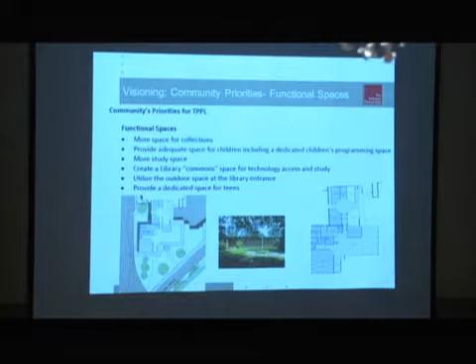From the visioning report in late or early 2014, people wanted more space for the collections, and that's been reiterated more than once as we've met with both staff and the public, that this is a materials-intensive library, and that's quite important.

Everybody wanted to see a separate children's area, to provide more study space, to really have a place for more technology, which everybody seems to ask for these days, and a place for teens. Years ago, people tried to figure out how to keep the kids out of the library, and now everybody wants to make sure young children and teens are really readers and that the library is part of their everyday life.

We developed a program—this is a summary. Basically, it tells us the library needed a little over 14,000 square feet. There is currently about 9,400 square feet. So part of the goal was to determine how we might be able to expand the library, with a goal of a little over 14,000 square feet.

But I think, as you might realize, anything is going to help—not only in terms of space, but in terms of the way it's organized and laid out. When you look at the library, there are some pretty important elements that are very strong parameters to decision making.

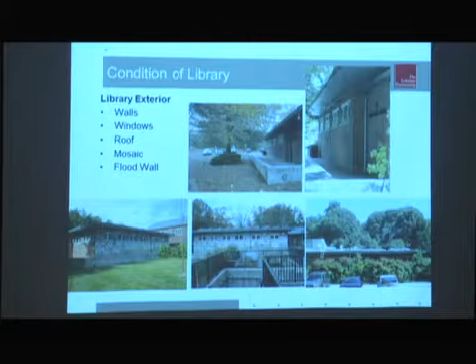There's also the mural on the wall, which is a very important element, we all think. But basically, the exterior of the library is in pretty good shape. The roof is in pretty good shape—it's got photovoltaics. Windows are pretty good, the walls are pretty good. So that's never been a real issue.

However, the inside is a different story. There are some pretty archaic mechanical and electrical systems. The furnishings are kind of old and tired, but you all know that—I'm not telling you anything you don't really know.

There are some code issues in terms of bathrooms—they're both inaccessible, and the number of fixtures doesn't meet current codes. The space between stacks doesn't really meet current ADA requirements, and when you begin to widen or lower stacks, it just takes more room to house the same collection. So there are some issues that need to be addressed from a code standpoint.

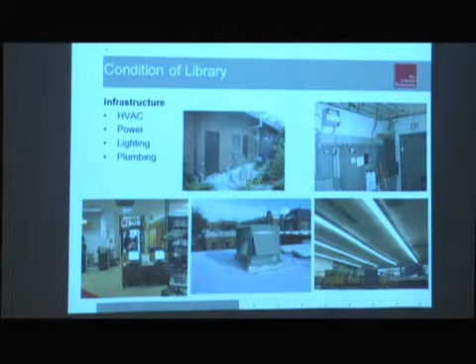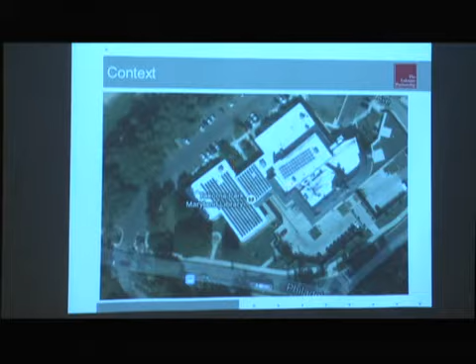But the building is basically in pretty good shape. So let's talk about the library, which is an aerial view here with the community center over here. We've talked a little bit about how important the mosaic is, and the fact that this is an interesting building. This is a black and white photograph of the existing building from the 60s.

Very simple, very clean, kind of an example of international style. To this was added the reference area, which is right in this area today. And the rear of the library has a whole other bay of space. But this is kind of what's there. A very simple L-shaped library with the staff at the apex of the two wings, adults at one end, children at the other end.

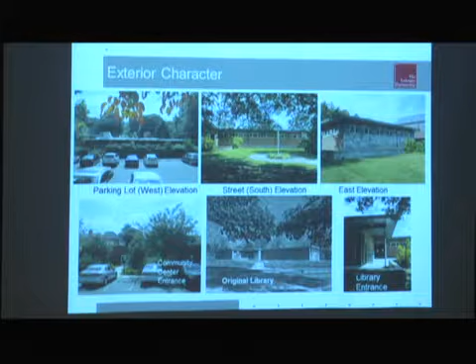Very logical and common way of designing libraries. Windows are typically fairly high, starting about 6 or 8 feet high, which enabled them to line all the walls with books and materials and bring high light in. What it didn't do is enable anybody to look outside, or anybody outside to look inside to see what's going on, to bring more natural light in, and to try to connect the inside with the outside. That's something we've talked about as part of the goals.

So here's a site plan of the existing library and site. The library is basically L-shaped, although it does operate several rooms around what I'll call the atrium - not a real atrium - with a second means of access. You can get there from the front door, or from the back door and come into the library. But it's a little bit disjointed, as you know.

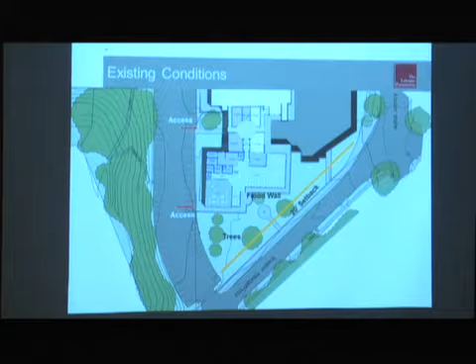The flood wall is an important element, and if we don't have to touch it, that's great. But if we do, we've got to somehow replace it. And we've talked about the mosaic as well. There's also a 20-foot setback from Philadelphia Avenue.

So when we look at the site and think, where are we going to expand this library? We really can't expand in this direction very easily because of all the parking. You can expand this way, but we've heard time and time again, try not to touch any trees - leave the image of this library in a park and expand it without hurting trees. You could expand this way, but that means addressing the mosaic wall, taking it down and either relocating it or putting it back up, and that's not an insignificant task.

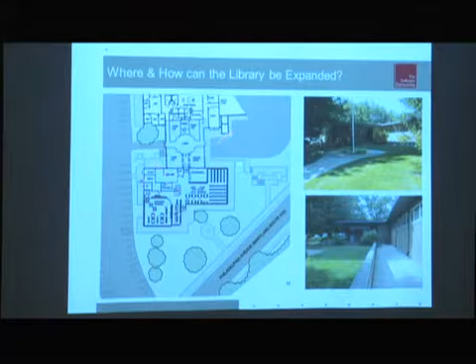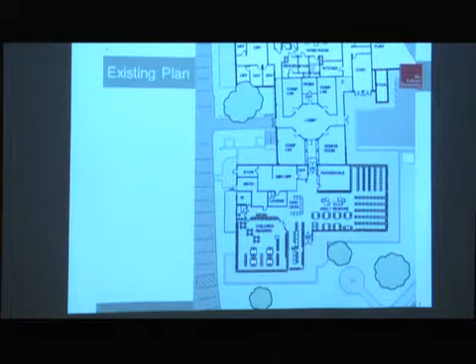People have talked about - this is actually one story down, where the police park - could you bridge over that? That's a fairly expensive way of doing it, and it's really kind of remote from the center part of the library. So we've struggled a little bit. You all know the layout: the children's area, a periodical and storage area, the adult area, and the staff area, which is quite small.

As we look at it, we think about how patrons are going to flow through the library. We want to make sure the staff can monitor what's going on in the library - it's important for them to be able to do that. We also want the staff to be able to interact with patrons and solve problems.

There's been an issue we've talked about over the last months of where is the front door to this library, because a lot of people come in this way, but a lot of people actually come in from the community center. We've talked at length about the connection between the community center and the library, that ought to flow somehow, especially since the library really operates several rooms that are part of it but are almost physically not in the library. So how can we make the library operate as one unit and flow fairly well?

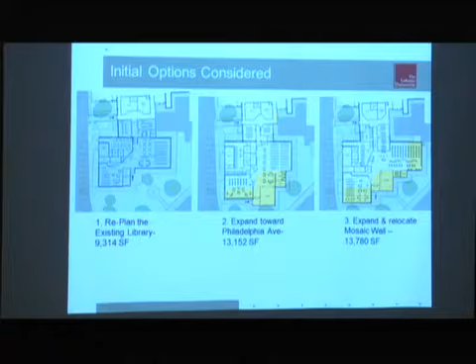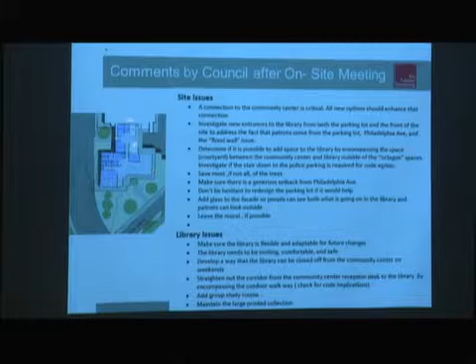So we thought the best place to really begin thinking about expanding is out in this direction, but keeping the trees, not really touching the mosaic because that's just opening a can of worms, but potentially beginning to think about filling in this area, which is kind of a landscaped area. But frankly, if you think of all of this as potential library space, it contains all the library functions in one area. So the proposal, and this is illustrating a piece of the community center as well, so you can understand how these all tie together.

What you see in yellow is new construction. What you see in tan is renovation.

Oh, thank you very much. Sorry about that, I just, excuse me.

And what we're proposing is, frankly, taking the entrance from over here and moving it over to where people park. So you can go directly from the parking lot into the library from this direction. There's also a major entrance that goes into the community center. We begin to tie together architecturally these two entrances to let people know, as you drive in or if you're walking and coming up this way—because you've never been able to walk up next to the flagpole and climb over the wall—so you might as well bring a sidewalk up and recognize the fact that there are two entrances to two civic public facilities right here off the parking lot.

It's where people expect to find front doors. So in this case, we're suggesting coming in this direction.

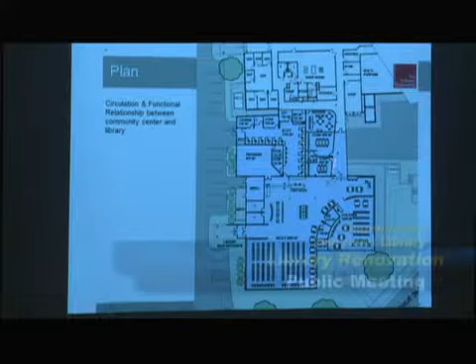These would be all glass walls so that you could see in, so that as you're walking down this area and looking outside, because this is all glass, you could also look into the computer room. So it's not like you're walking down a corridor, you're really walking through a space.

And this is a fairly wide corridor that gets wider as we get to a place where you go down a couple of steps, because the floor level of the community center is about 10 inches higher than the floor level of the library.

And for those of you who've come in down the ramp, that's exactly why there is that little ramp there from the atrium area. So we have to make that up with another little ramp and probably two steps.

So this is the proposed layout. It's about 15,000 square feet, so it meets the size requirement that we thought was required.

And so then we decided to investigate from a 3-dimensional standpoint what this might look like. And for those of you who can remember what the outside of this building used to look like, this is kind of a little aerial.

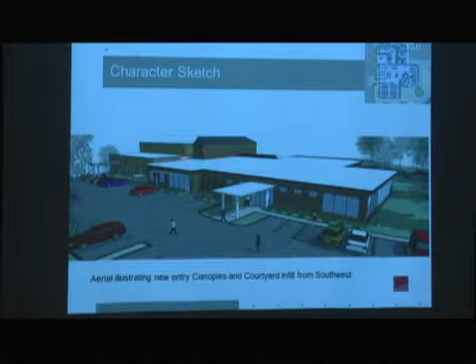Got three things going on here. I'm looking in this direction. This is the existing library, and this is the existing community center.

And you can see basically the canopies. This is a little elevated aerial. This is your flagpole. These are the actual locations of the trees from the survey that we have.

You can see that we've kept the mosaic, and that stops here, but we've expanded the building a little bit more, and we've simply wrapped more glass around it.

Now, this is pretty conceptual at this point, so don't think of this as a final design, but it's a conceptual thought that enables people, as you're driving by or walking, to be drawn into the library, to hopefully discover what's in the library. It's both from a marketing standpoint as well as from a standpoint that it's good for healthy buildings to have natural light.

Frankly, the first couple of times I came to the library, I actually drove by it because it was dark and at night you couldn't find it. So having somewhat of a subtle lantern will enable people to find it. It becomes, I think, an important civic building.

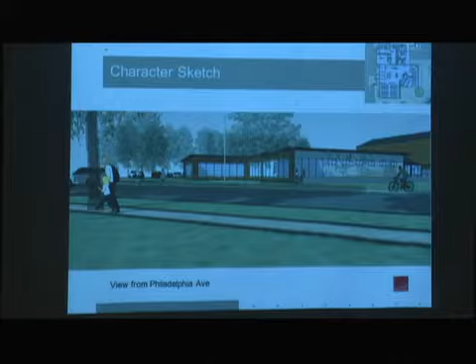From a floor level, if you're across the street, this is the exact location of the mosaic, so you can see we're trying to expand this building so it looks like a natural expansion. We're not trying to impose some new architectural expression on a very simple, straightforward, residentially scaled building. The way we think it ought to be enhanced is through some more glass, with some stepping in it so it doesn't seem overwhelming.

Just a little closer up - an idea of coming into the entrance. These are existing windows, I should tell you. But if we come in to the side, we're showing a little stone wall, a little canopy to lead you into the new entrance.

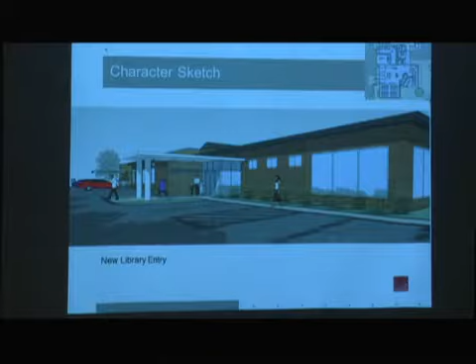We're suggesting that perhaps whatever happens here happens at the community center too, so there's an indication at both locations that here's a front door, you're welcome, it's lit, it's welcoming, hopefully. Just a closer view.

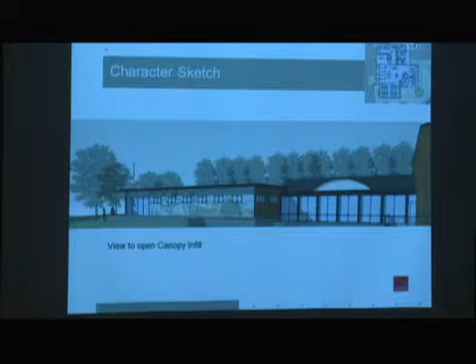Then looking the other way from the community center, we're illustrating the mechanical equipment that's still there, so you can get a sense of what you have. But as I said before, people expect when they drive into a parking lot to find a front door and not have to search for it. So we thought it would be helpful to illuminate and have some sort of sheltered enclosure for both. This is a weird shot because this is a depressed area down here where the cars are parked.

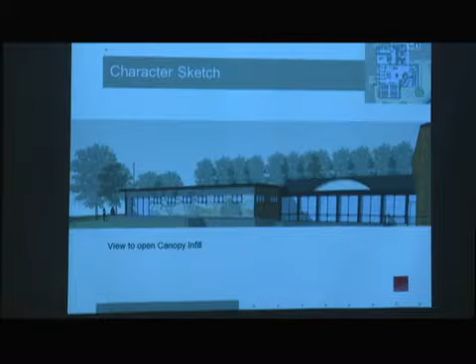But just to give a sense, this is that corridor, and we haven't changed anything here. These are existing columns, and we're simply putting glass between them so you can walk down that corridor directly into the library. Of course, this is all existing, as are these walls. So the garden is still here. We haven't touched some of the landscaping that we've heard is so important.

So that's kind of a big picture of where we are at this point, both from a standpoint of planning how the library might be expanded, and an idea of what it might look like. We haven't spent a great deal of time doing anything other than massing it, to test the plan and see whether it could turn into a nice building that reflects the existing character and continues the theme that's already here.

So, yes sir, if you can go back to one of the floor plan views. Something people may wonder is, is that really all the stacks that there are now, or how does it relate? And can you point out the edge treatment that may not be clear to people. Yes, that's where a lot of that is. Thank you.

We've counted all the stacks in the library today, and all of our options are either right on or very close to the existing number of stacks. That's been one of the goals. We've talked about many newer libraries having much lower stacks, 60 or 66 inches high, while a lot of your stacks are 84 inches - we're going to keep those because it's important to house the collection you have. There are also high windows in the library, so we're taking advantage of where there are high windows and lining those walls with stacks as well.

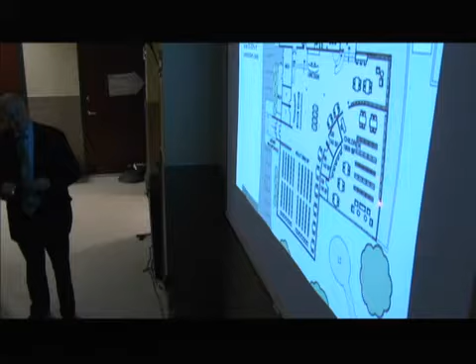And we do have stacks here, but they'd be low, below window sill height. So we're taking advantage of this. Certainly in a children's area, there are opportunities for picture books to be low in any case. And for an adult, these are stacks too that are low—perfect locations for things like periodicals, where you might come in, read the newspaper, with the periodicals on some low shelving in front of you.

So where's the periodicals? Could very well be against the windows. We haven't really determined exactly where everything is. What we're trying to do is illustrate that we can fit the programmatic elements within this space. Ellen's staff has made some suggestions reflected here, but we haven't gone any farther than saying, let's test this. You can see a great deal of space here that has, quote, nothing in it, but ultimately would probably have computers, new book display, more tables and chairs—we've actually fit more tables and chairs than we initially thought we could.

I'm not even sure I can give you the number, but—so there's in the curve. On the inside, there's two small rooms. What does that say? It says GS—group study. There are three little rooms where people could come in and either study together, do literacy training, a group project if kids or adults, or just one person could go in because it's quiet, and things outside are noisy.

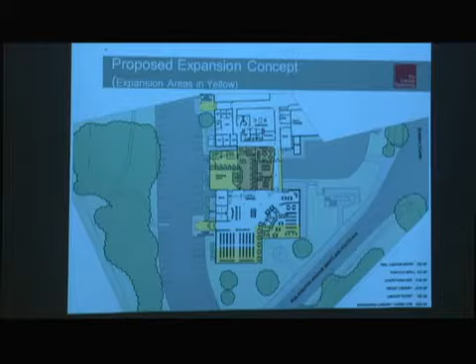Can you talk a little bit more about the natural light? The building, especially as it expands in those directions, gets deeper and wider. I see you've got these two or three walls going really back here, natural light, which is fabulous. But I'm also looking at the walls that exist now - the wall where the mural is, which is understandable, there's no point adding windows to that.

And then one side has the mechanical and the toilets, and the other side is like the center of the building. So is it really going to be adequate daylight just to have those three new walls at the edge? Do you need skylights? You've got this beautiful space right in the center of the library, which is the really public welcoming space, but I'm wondering, is there really going to be enough daylight there to make it feel good?

I think there will be, but it's a good question and we can investigate that. The key, perhaps one of the parameters here, is that there are solar panels on the roof right now, and they pretty much cover the entire roof. We'd have to figure out whether we could bring any more natural light in.

This is all glass, in quotes, but it's so deep - how wide are the bays? I can't tell you the exact dimensions, but it's deeper than 60 feet. In terms of this direction, from the glass inwards, it's about 45 to 50 feet from here to here.

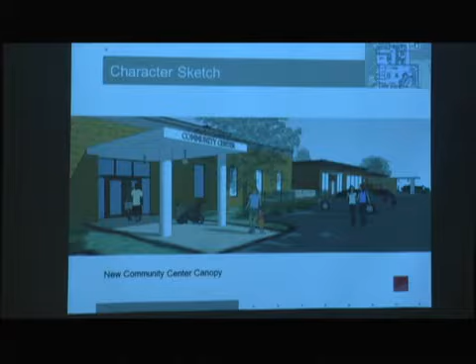Yeah, I think I kind of like it actually, but further to the mosaic idea, mention something there, something artistic, so you could say go in the entrance with the dolphin versus the entrance with the locust. I mean, something on the walls so that you're not always saying library entrance, community center entrance. Something visually aesthetic that you can distinguish between the two entrances quickly from the side, not just the front. I agree, I think that's good.

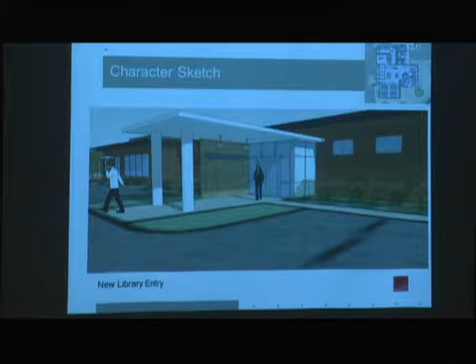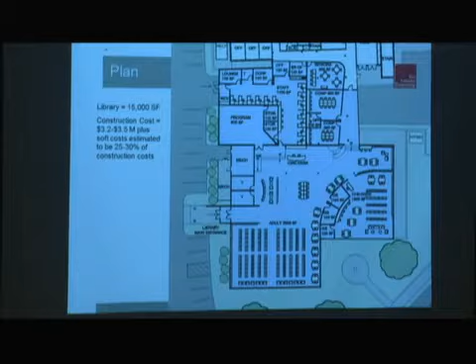Yes ma'am, could we go back to the layout please? It appears to me, please correct me if I'm mistaken, that to use the senior room, if you come in the main door of the library, you'll have to go through the entire library, up the steps, down the corridor, through the door, around the corner, and into the senior room. That does not seem to me to be very welcoming.

Well, you can also— where's the, I don't have the whole thing. I mean, there's also the opportunity of coming in this way, through the other door, if you don't go.

Because one of the issues is that they would like to be able to have some of these spaces open when the library is closed. So that was another issue of how do we tie the community center into both the community center and as well as the library.

Is there any reason, though, that the senior room and the two below it couldn't just be moved over flush to the outside wall and have your hallway run through the middle and come out closer to the...

Yes and no, and I'll explain why we showed this much of this. There's a lot of jogs in the corridor around here. You come in here and you hit this little funny jog and you come down. Currently, you come and you do a jog around here and you come down.

One of the thoughts with some of the folks we've been talking to said, gee, if we can have some straight shots, being able to see from the reception desk into the library, that would enable that connection to be a little bit more direct so that you're not always having to take a zigzag approach. So in answer to your question, absolutely, yes, you could push it against the window. And that's the reason why we didn't, to try to begin to find a way of connecting.

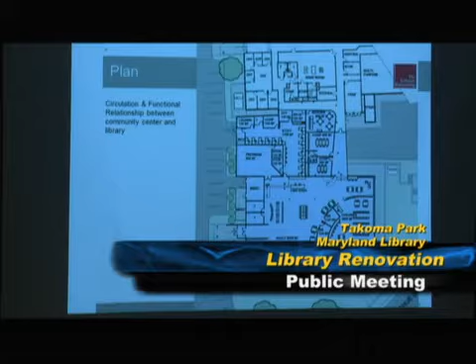When you were here the last time, I mentioned that there's so many nannies who come out after the meetings, the events, and they congregate along the wall. So I suggested we still have a space for people to congregate just a little bit for those few minutes that they want to spend talking to other nannies, like if you're coming out the entrance to the left.

Right, and just a couple little cafe type things or benches so the nannies can sit and bring the baby carriages right up in front of it, which is what they often do, and just have some little space there. It's also a good place for kids to wait for their parents. As we develop this and take a look at the parking, I have this feeling that a lot of the parking spaces are really wide, only on the side next to the building. But perhaps there's a way of not losing any parking and capturing an area like that by restriping, could you lose two spaces and create a little green area where you could sit out?

So I think that's a good suggestion, and we'll write it down.

Back to Ian's suggestion about the vestibule. I'm looking at the main entrance to the community center, and the distance between those two sets of doors, thinking about that dimension. There's space to address it in this main entrance to the library. You're right, it's too small right now.

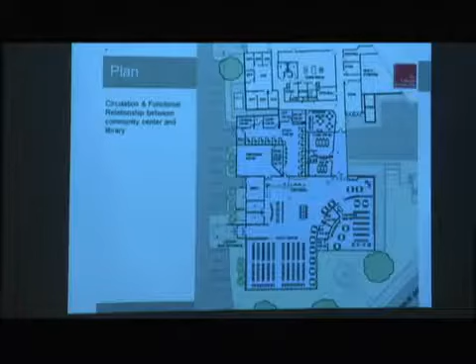But if your stacks are still good, we've actually reused stacks and electrostatically painted them—you put a charge on them and change the color. Very simple, if the stacks are good metal stacks, and just put new end panels so it looks like a new collection. So there are lots of different ways of manipulating furnishing costs, but stacks are one of the big costs.

Bruce, could you refresh my memory—with the parking lot near the co-op and that whole project, is that going to go forward soon? Is there any way that space could still be used for trailers for the library books while this is being completed, or is that a done deal? That's too late to consider. My best answer is I have no idea.

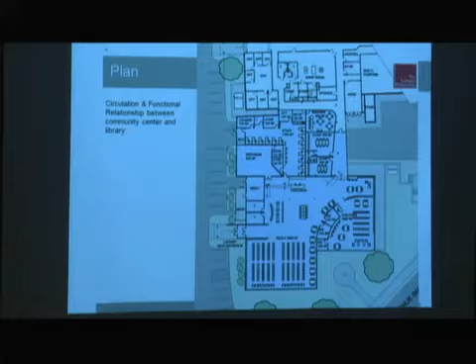I don't think they got the contract yet. We've worked with libraries who had a couple of double-wides in a parking lot offering limited services—there are lots of different ways. There were trailers back here for the community center construction. I'm not surprised. With a lot of activity in that co-op lot, it would kind of redefine the area with energy for people going there, and might give a better idea of what we really should have there eventually.

It'll be another important discussion. I'm sure, yes. So if there are no other questions or comments, thank you very much for coming and for all the suggestions.